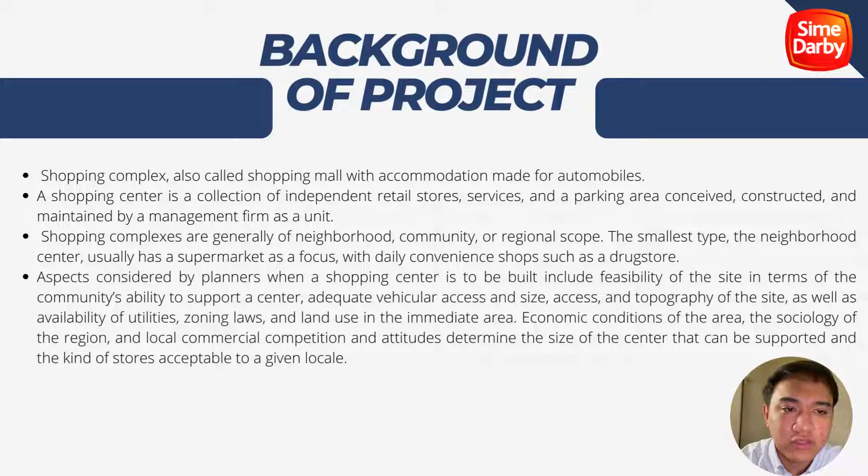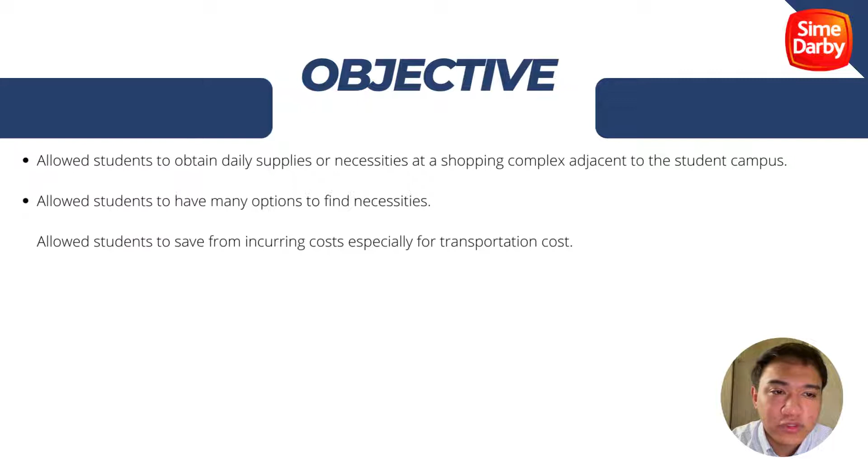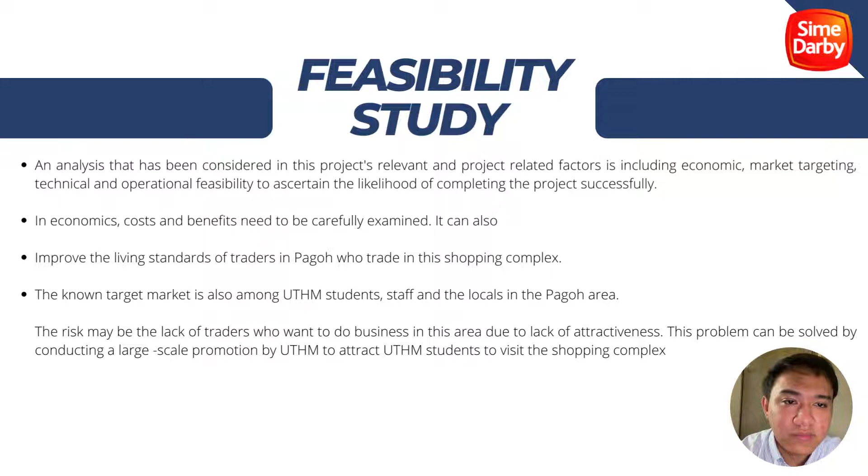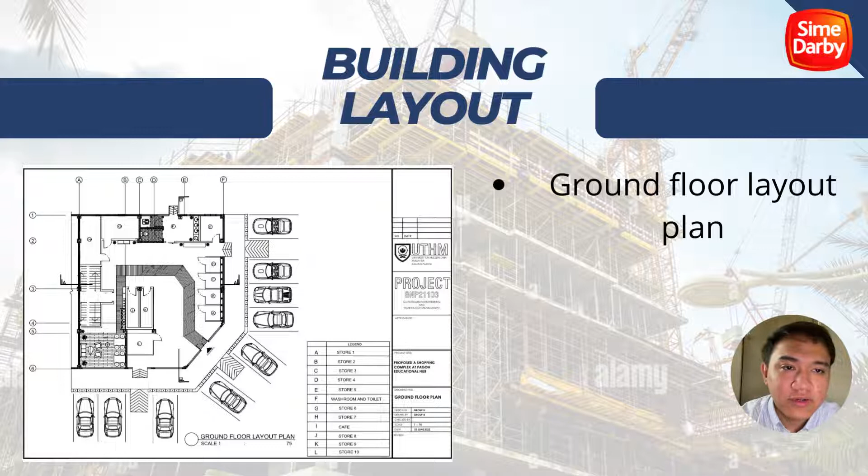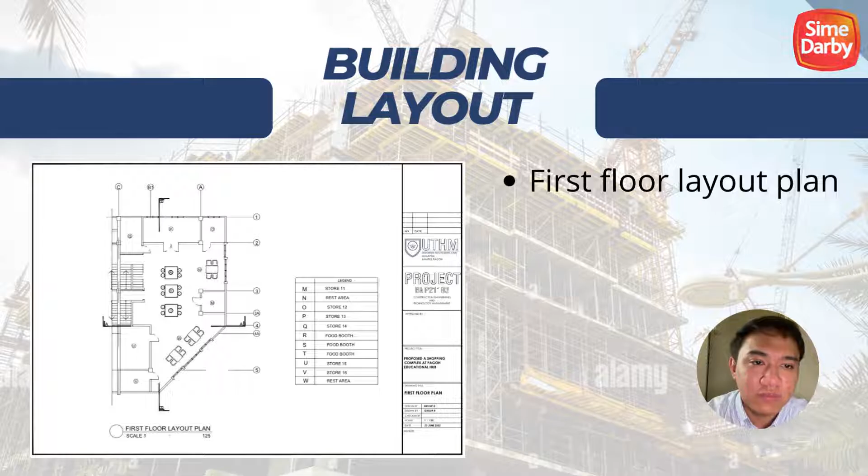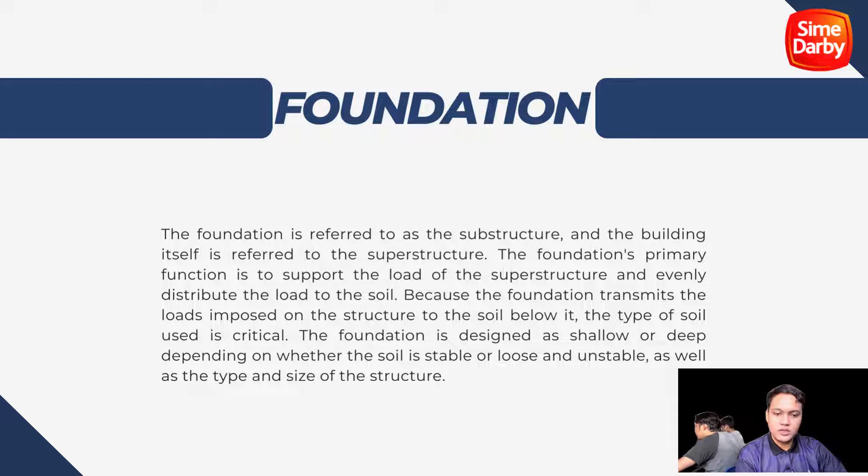A foundation is a part of a structure that is in direct contact with the ground and to which loads are transmitted. Every structure, no matter how large or small, requires a foundation. The foundation bears the weight of the building and ensures its stability.

For the site, we need to ensure the types of soil. In EDU Hub Pagoh, the construction site is more sandy soil. When the percentage of sand in soil is high, it is referred to as sandy soil. It has the largest particle size of any soil particle.

Sandy soil does not become sticky. It lacks cohesion. The structure is light and loose. As a result, it lends itself well to construction.

Sandy soil makes an excellent aggregate for concrete. Aside from cement, it can also be used as a mortar construction material. Sandy soil is also used to build exterior rendering materials, because of its chemical resistance. Sandy soil is also ideal for use as filling sand.

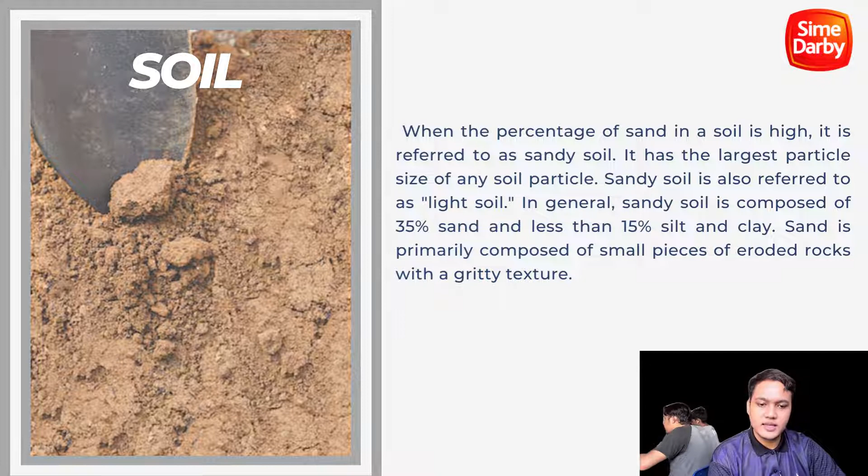So after we ensure the types of soil, we can jump into what foundation we will use. As a developer, Sime Darby had to propose a commercial project at Pagoh Education Hub, the foundation to be used that is suitable to the soil is deep foundation.

A deep foundation is a type of foundation that transfers building loads to the earth further down than a shallow foundation, thus to a subsurface layer or a range of depth. A deep foundation's function is to transmit the weight of the building to the firm layers deep inside the ground. In this foundation, the depth to width ratio is greater than 4 to 5.

When compared to shallow foundation, the foundation distributes the weight of the superstructure vertically rather than laterally. When the required loads from the superstructure cannot be supported by shallow foundation, these foundations are used. Another reason we prefer deep foundation is that they can be prefabricated off-site, allowing for faster installation on-site.

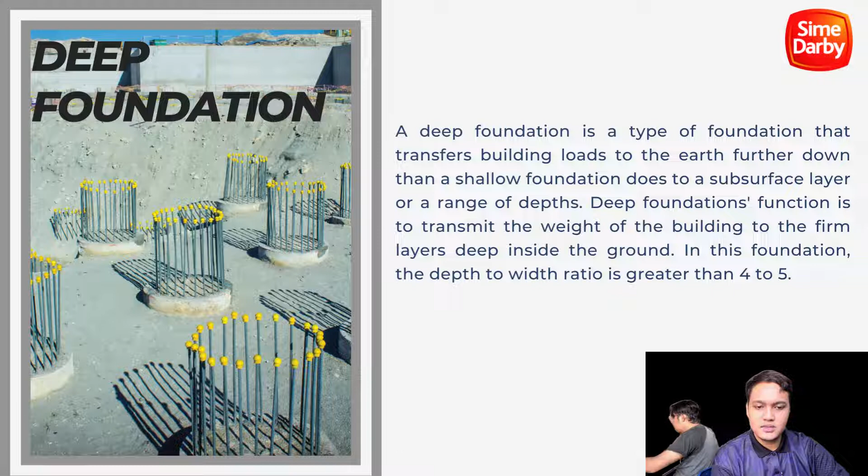Finally, vibrations are produced when piles are driven, affecting neighboring structures. The foundation has another disadvantage also in the piles, which is piles can corrode and require daily inspection.

So lastly, we use friction piles as our pile foundation. We also use pile foundation in the substructure. Pile foundation is a type of deep foundation that consists of a slender column or long cylinder made of materials such as concrete or steel, used to support the structure and transfer the load at the desired depth via end bearing or skin friction.

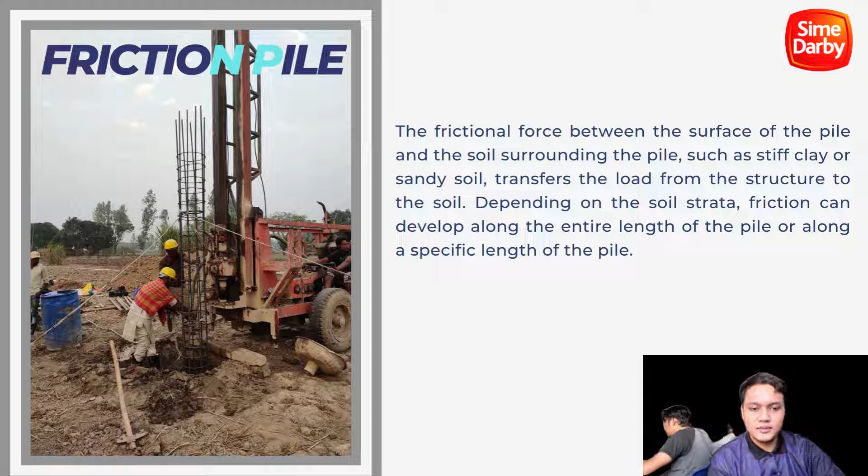Because of its suitability with the type of soil and foundation, we use friction pile as our pile foundation in this project. The frictional force between the surface of the pile and the soil surrounding the pile, such as clay or sandy soil, transfers the load from the structure to the soil.

Depending on the soil strata, friction can develop along the entire length of the pile or along a specific length of the pile. In general, the entire surface of a friction pile works to transfer loads from the structure to the soil. The pile's capacity is determined by multiplying the pile surface area by the safe friction force developed per unit area. When designing a skin friction pile, the skin friction that will be developed at the pile surface should be thoroughly evaluated, and a reasonable safety factor should be considered. Aside from that, one can increase the pile diameter, depth, number of piles, and make the pile surface rough to increase the friction pile capacity.

So that's all from the substructure component from our group.

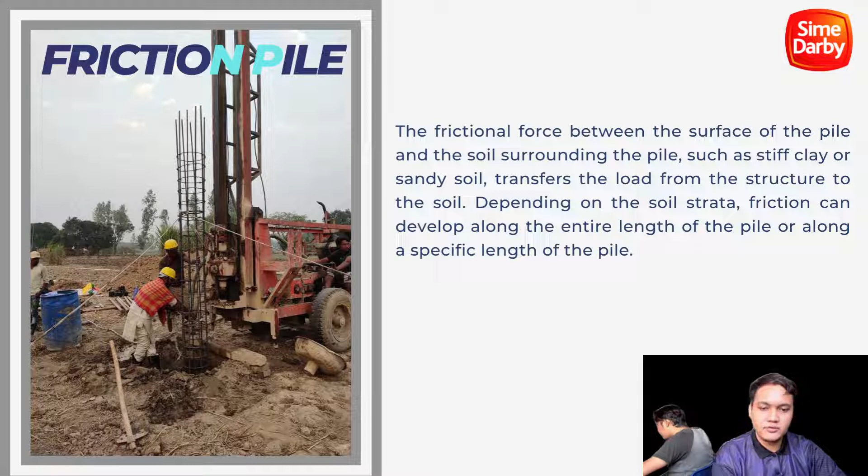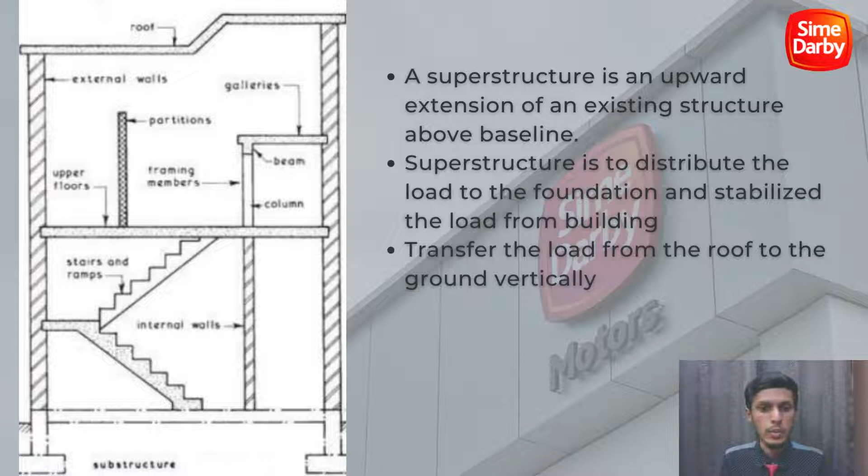What is a superstructure? A superstructure is an upward extension of an existing structure above the baseline. The superstructure distributes the load to the foundation and stabilizes the load from the building, and also transfers the load from the roof to the ground vertically.

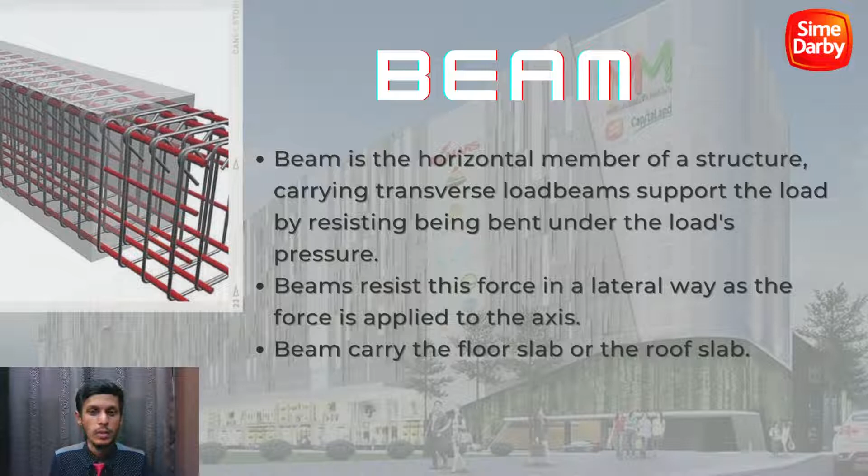Beam. A beam is a horizontal member of a structure carrying transverse load. The beam supports the load by resisting being bent under the load's pressure. It resists the force in a lateral way as the force is applied to the axis. The beam also carries the floor slab or the roof slab. This is the step of construction of an RCC beam.

The next one is reinforced concrete. It is a composite material that has low elasticity but higher rigidity and flexibility because of the incorporation of reinforcement. Its strength and durability also allow it to hold a two-story mall. The usage of precast concrete allows for faster and safer construction.

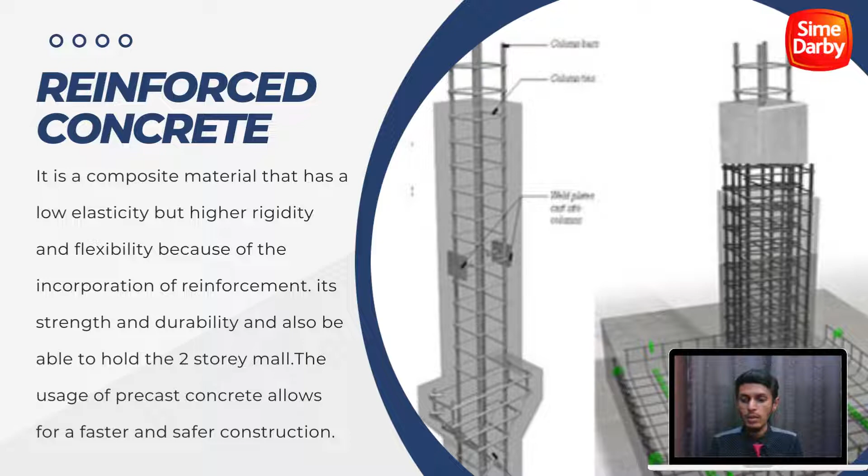We have used a chilled beam for our shopping mall. It is used for cooling and ventilation spacing where a good indoor environment and individual space control is valued. It uses water to remove heat from a room and is located in the room space, primarily used in locations where humidity can be controlled, maximizing the opportunity for free cooling and heating.

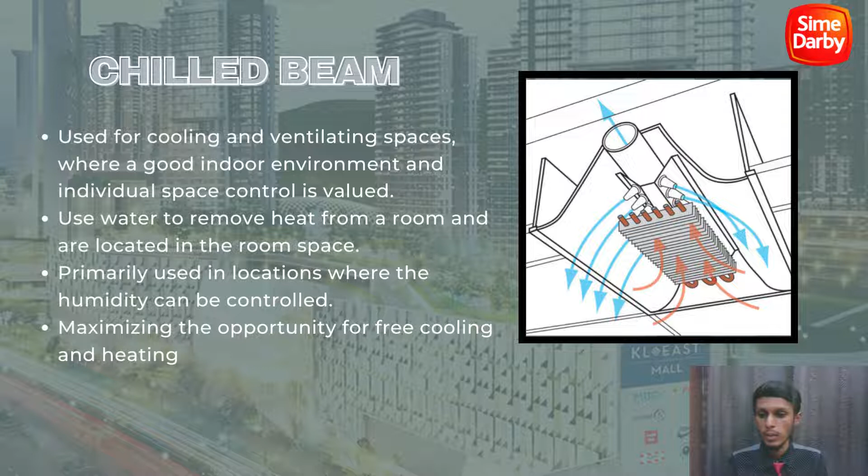This is a very important part in constructing a shopping mall: walls. Rebars ensure the concrete wall has higher compressive strength. Clay bricks were also used as one of the components to construct the wall for this shopping center, using a Flemish bond. The brick walls were then cladded with concrete before being given a paint finishing.

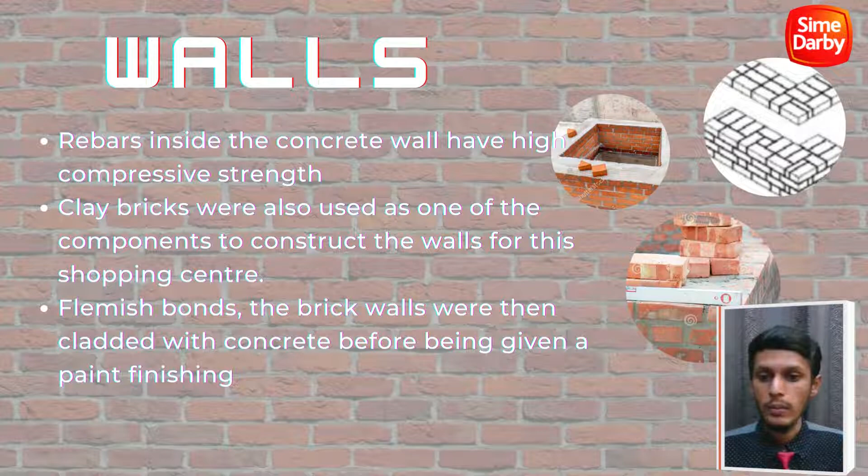Plastering works. Plastering work is a thin layer of mortar applied over the masonry and it acts as a damp-proof coat over the brick masonry work, done together with internal wall finishing. The thickness of the plaster is 20mm on both sides.

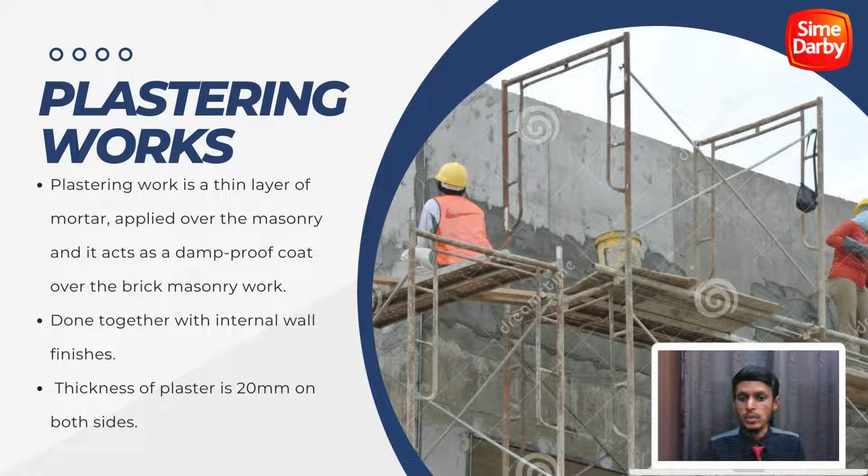Staircase. The primary purpose of stairs is to provide a simple and easy means of moving between levels. The basic components of a staircase are the tread, the horizontal surface we walk on; the riser, the vertical part between each tread; and the stringer, a structural support that holds the treads in place and provides stability.

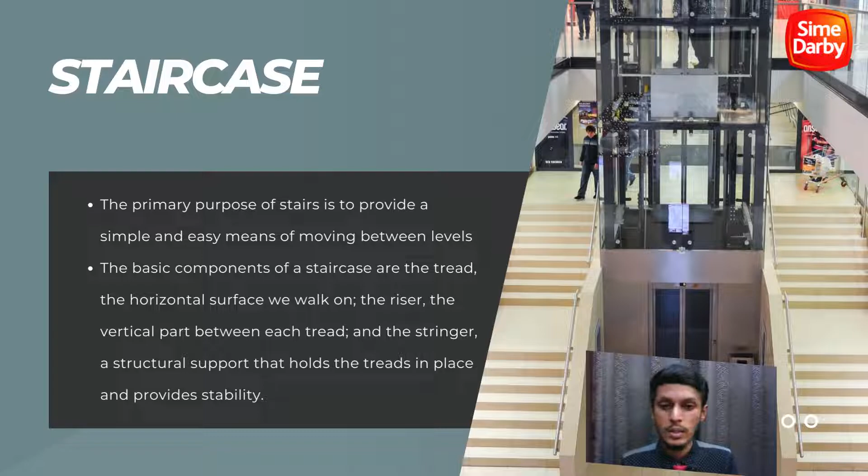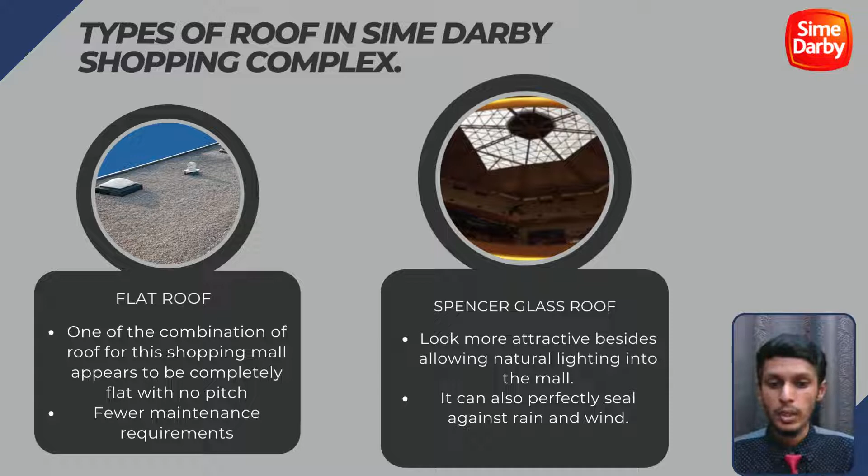These are the two types of roof we have suggested for the Sime Darby shopping mall. The first one is a flat roof. One combination of roof for this shopping mall appears to be completely flat with no pitch, also requiring fewer maintenance requirements. The second one is a spencer glass roof, which looks more attractive besides allowing natural lighting into the mall, and it can also perfectly seal against rain and wind.

These are the two main types of doors in our Sime Darby shopping mall. The first one is the sliding door, used for the entrance door. Four operating options: fully automatic, half open, always open, and always lock. It also has a sensor which can be used to detect obstacles in the path of closing doors, maximizes natural light, and finally it's eco-friendly.

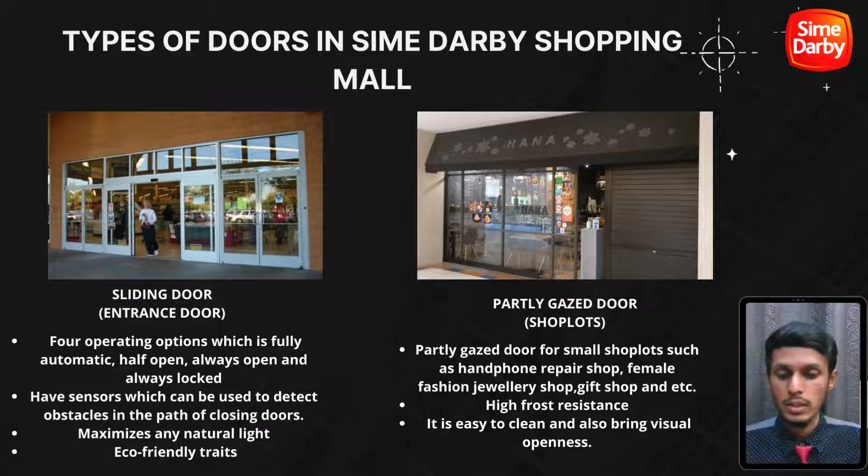The second one is the partly glass door. It's usually used for shop lots, such as a handphone repair shop, jewelry shop, and gift shop, etc. It also has high frost resistance, is easy to clean, and brings visual openness.

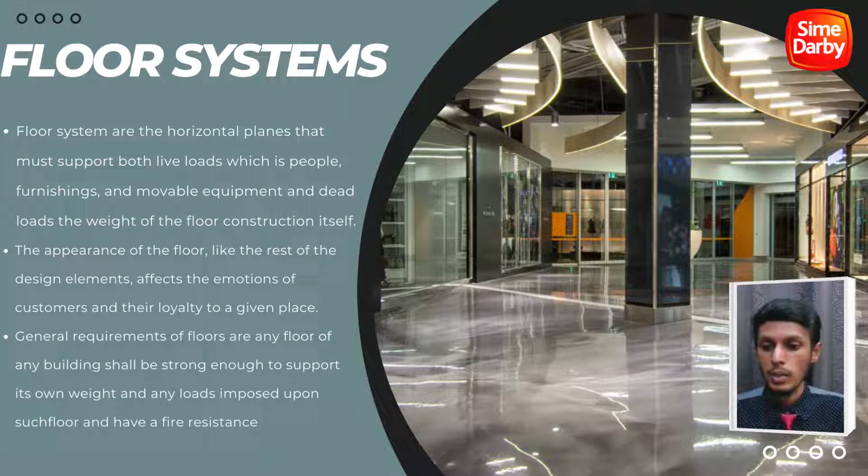Now we have come to the final part of our superstructure component of our shopping mall, which is floor system. Floor systems are the horizontal plane that must support both live loads, which is people, furnishing, and movable equipment, and dead loads, the weight of the floor construction itself. The appearance of the floor, like the rest of the design elements, affects the emotions of customers and their loyalty to the given place. General requirements of any floor of any building should be that it is strong enough to support its own weight and any loads imposed on it, and have fire resistance. Thank you.

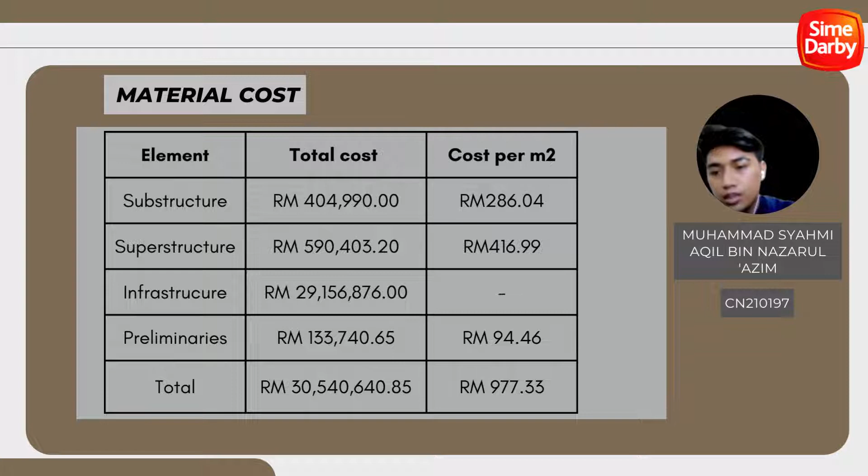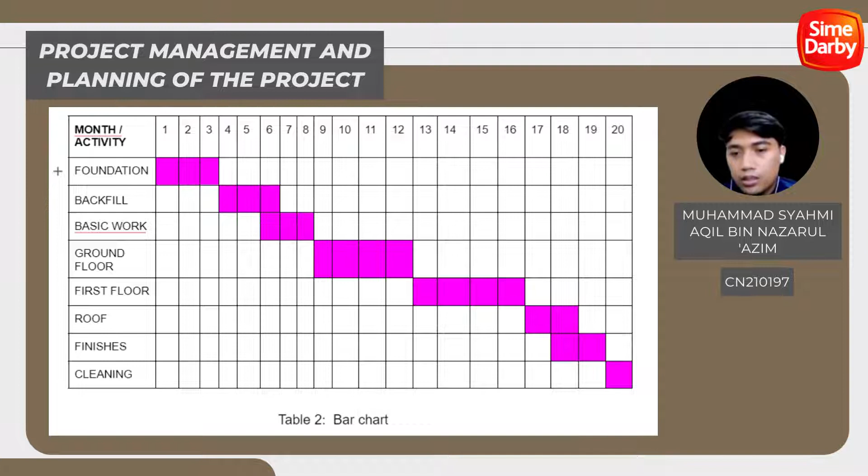This bar chart will help us complete the project smoothly, and as we can see, we can surely know what happened before, what happened now, and what happened after. In this table, we propose some activities in the project, which is foundation, backfill, basic work, ground floor, first floor, roof, finishes, and cleaning.

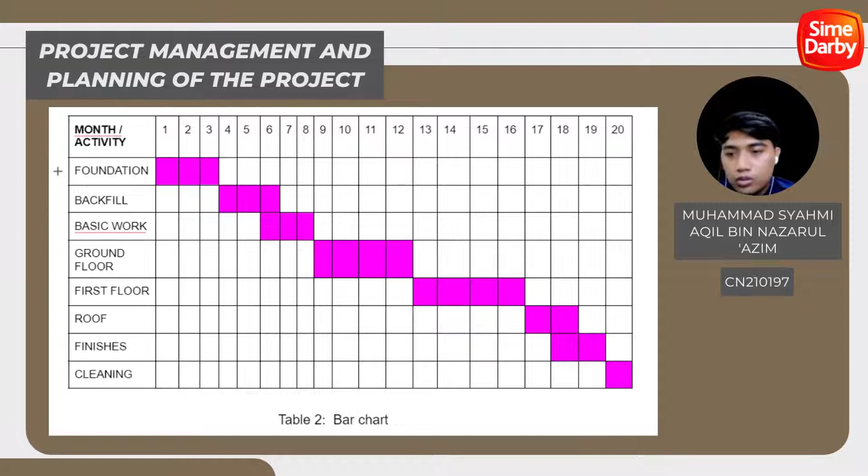In conclusion, this is a core course which will provide an understanding and ability to analyze and design structural elements. Among the topics discussed are objectives and methods of design, costing, analysis, and design of sections for moments and shear, and detailing about commercial project design. Furthermore, the student will be exposed to the concept of substructure components and superstructure components of the complex.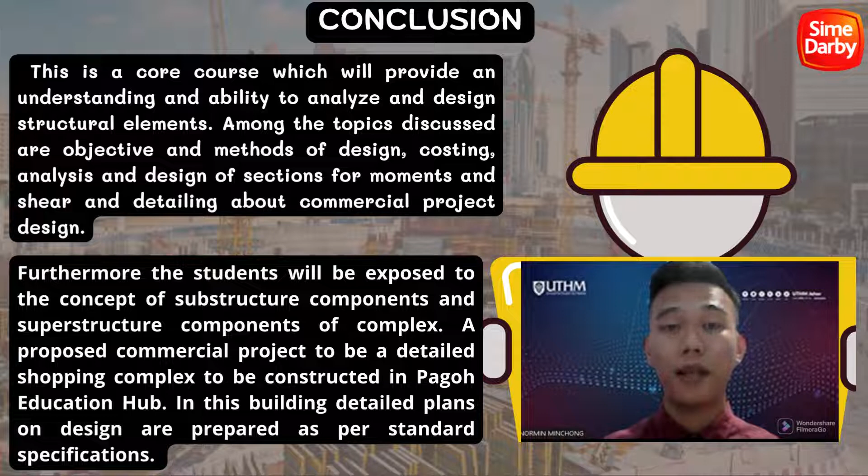A proposed commercial project to be a detailed shopping complex to be constructed in Pagoh Education Hub. In this building, detailed plans on design are prepared as per standard specifications. After that, the attempt of this project made us understand the concept of design of slab, beam, column, footing, foundation, substructure component, and superstructure component of the complex.

In detail, we also gained knowledge in software like AutoCAD and some codal provisions. In this commercial project, analysis and structural design has been done for a commercial building of a shopping mall in Pagoh Educational Hub. Lastly, detailed drawings pertaining to the structural design of the shopping mall are presented. The shopping complex is built with almost all the amenities required for people to get entertained in their busy schedule. This structure is going to be designed with the view that all the entertainment facilities should be made available under one roof. That's all from me. Thank you.